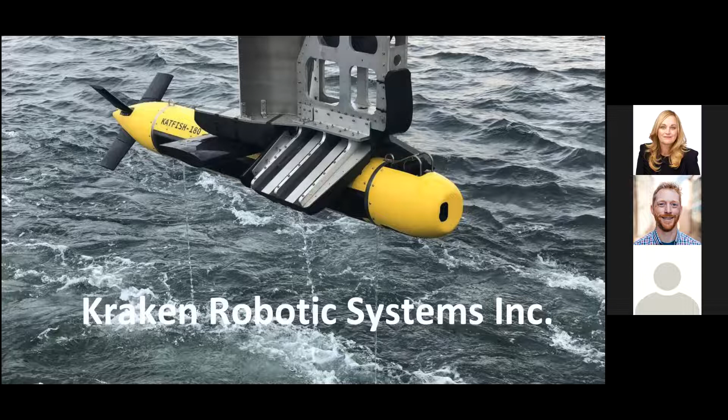So a brief introduction to Kraken. Kraken Robotic Systems Inc., headquartered in St. John's, Newfoundland, is a marine technology company. Last year we acquired Pangeo, also a Newfoundland company, establishing not only a product division but also a subsea service division. We now provide an integrated solution from sensors to fully turnkey robots.

We have grown to 225 employees, spread all over the globe. We have offices in Canada, USA, Germany, Scotland, Denmark, and Brazil, and we deliver services and products to over 20 countries.

So this is a little bit of our organogram from an office perspective. We are located in Rio de Janeiro and Salvador, Boston, Bremen, Rostock, Copenhagen, and of course St. John's, Halifax, and Toronto.

One of our main and first products ever created was a synthetic aperture sonar, quite a revolution in how you do seabed survey, since it provided about 30 times the area coverage of previous technology with better resolution and quality. This product we exported to many different clients and integrated into different market AUVs for autonomous seabed survey, and we recently also launched the same capability for man-portable AUVs for quick deployments.

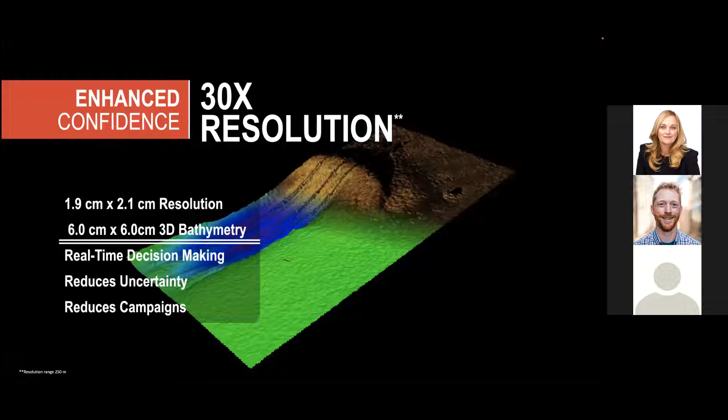With a synthetic aperture sonar, you can see the seabed with acoustics at 2 by 2 centimeter resolution, with included 3-dimensional bathymetry. So you have a full 3D, high precision image of the seabed, and you can acquire that level of data with that clarity at 4 square kilometers per hour in a survey - 10 times what the usual area coverage rate would be with previous technologies.

We developed the sensor in Newfoundland and integrated it into a turnkey solution for seabed survey systems for mine hunting and other applications, both in offshore wind and oil and gas.

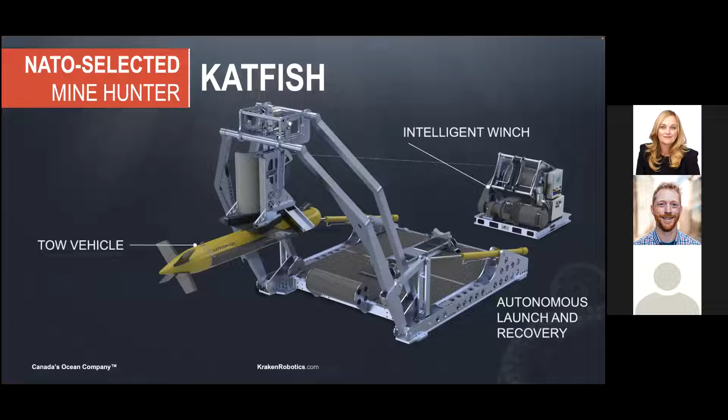We integrated the sensor, the synthetic aperture sonar, into a tow vehicle, which is very high speed. We developed an autonomous launch and recovery system and an intelligent winch. So this high-speed tow vehicle can operate at up to 10 knots with a 440-meter swath and over 4 square kilometers of area coverage.

With the exclusive Kraken deployment intelligent winch, which is heave compensated with active terrain following, auto tension, auto render, and an actuated A-frame, we can install this high-speed tow vehicle into ASVs, enabling full unmanned operation, with about 2 times the standard operation envelope, so you have way less weather downtime.

We also produce SeaPower, our line of subsea batteries, which instead of being oil compensated in a pressure housing are silicone encapsulated, doubling the current AUV endurance while still having less weight and volume. This is a special technology for deep waters, and we have integrated it into quite a few vehicles.

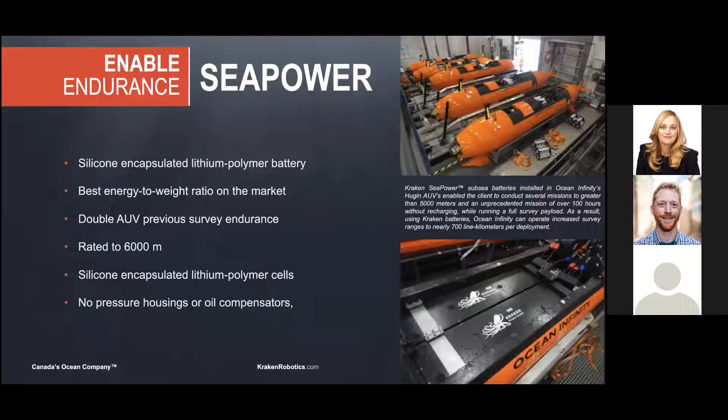With the acquisition of Pangeo into the Kraken family, we also now have our service business with the acoustic corer, which is a subsea bed acoustic coring tool with up to 40 meters of depth penetration. It's used for foundation location on offshore wind, jackup infrastructure decommissioning, and any geotechnical ambiguity in both oil and gas and offshore wind.

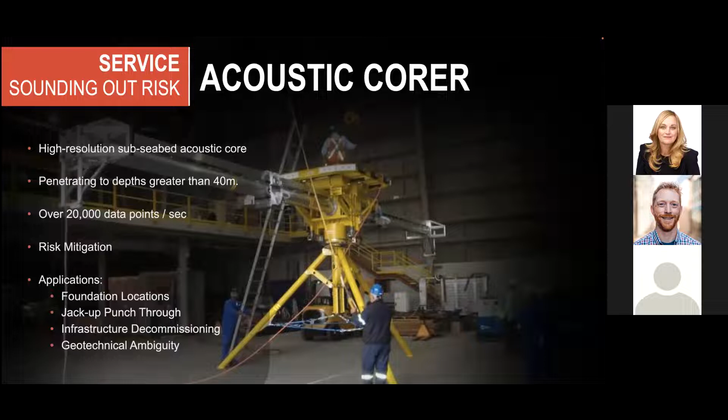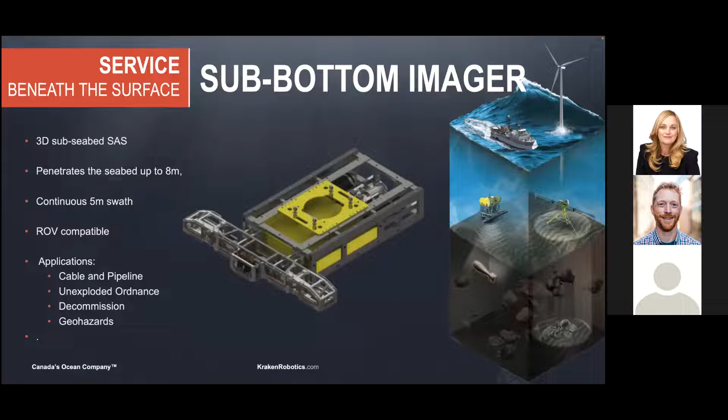We also have a 3D subsea bed synthetic aperture sonar array, which is mounted onto ROVs or as a tow vehicle, providing a continuous 5 meter swath for subsea bed analysis of up to 8 meters. This is usually applied to cable and pipeline burial analysis, unexploded ordnance finding, decommissioning, or general geohazards.

So this is a little bit of Kraken from a company perspective. Now we're going to go into the specifics of this webinar, which is the 3D laser technology developed at Kraken.

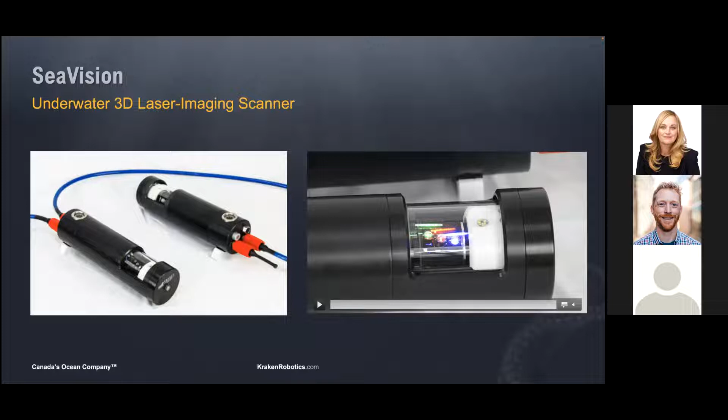So from our perspective, SeaVision is a 3D laser imaging scanner. It's a very compact twin pod system with a laser mounted internally on a turret. Within each of these pods, there's an embedded GPU, LED light, low light cameras, the lasers, and an IMU.

From a software perspective, we are combining laser technology with edge AI, computer vision, and photogrammetry. We combine all those capabilities to enable subsea field digitalization and metrology.

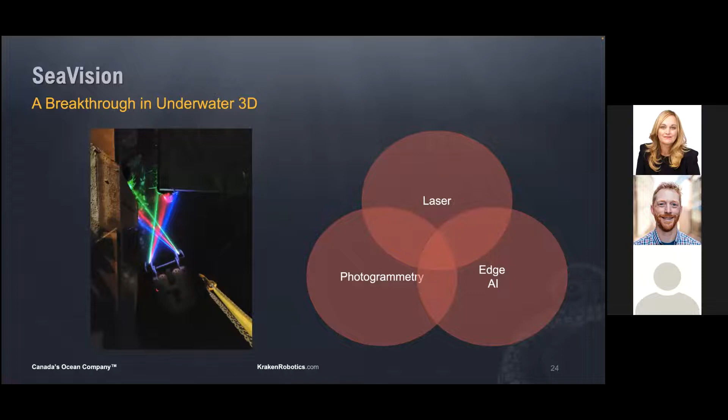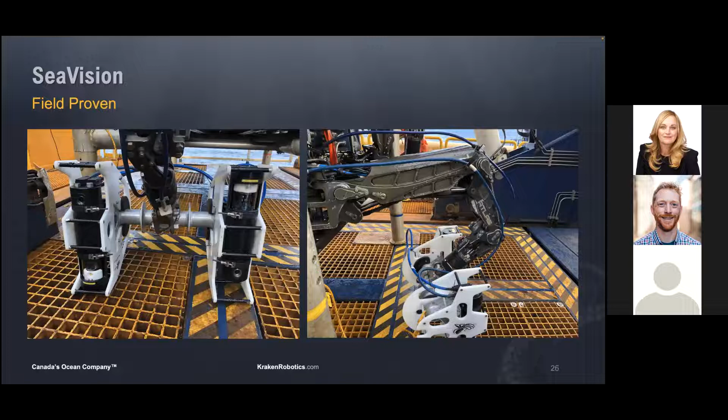SeaVision usually goes into any standard ROV used to maintain subsea fields. It has been deployed in Newfoundland, as well as other oil fields, offshore wind, and research applications around the globe.

The principle of SeaVision is that you have a three-dimensional reconstruction of the object ahead, in front of what you're observing. So you create a metrology-accurate 3D model of your structure.

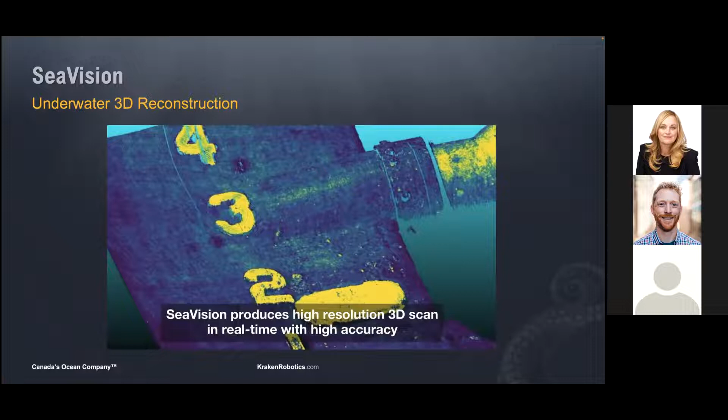SeaVision is also a laser imaging solution, meaning it's not only about the 3D, but also has the capability of generating high dynamic range photography co-registered to the point cloud. So you have a high definition, high dynamic range image, and at the same time a three-dimensional model of the structure, which allows you to measure.

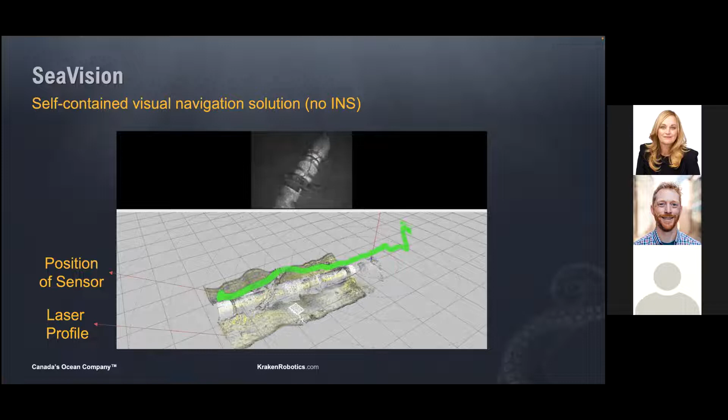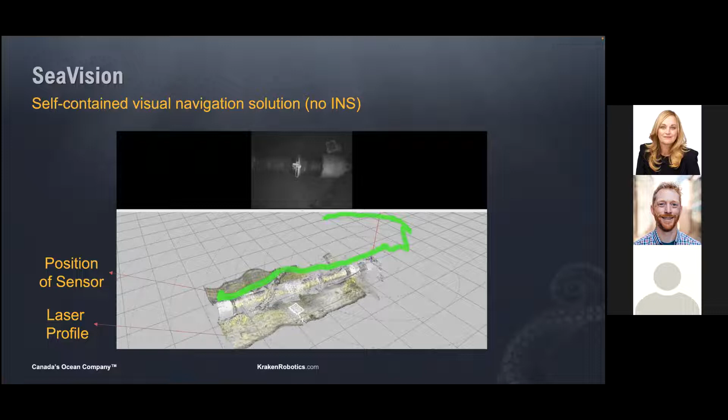SeaVision also operates not only with laser technology, but also with photogrammetry, enabling a self-contained visual navigation solution, allowing it to be directly attached to an ROV without needing an inertial navigation solution for the vehicle or inertial navigation calibration. It doesn't need a USBL, DVL, INS with a depth sensor, or sound velocity probe. You can just install the sensor, take it to the field, and reconstruct in 3D.

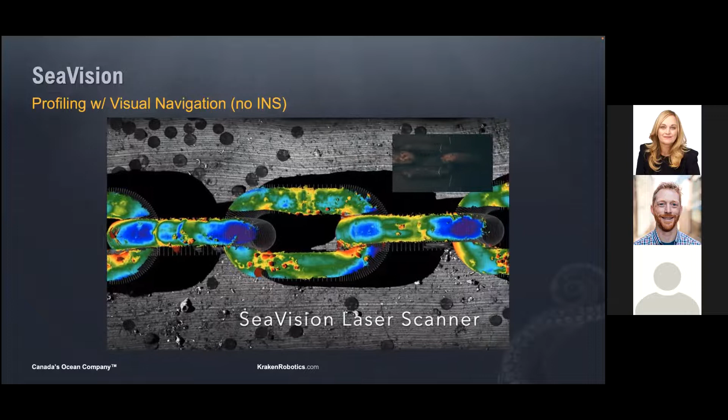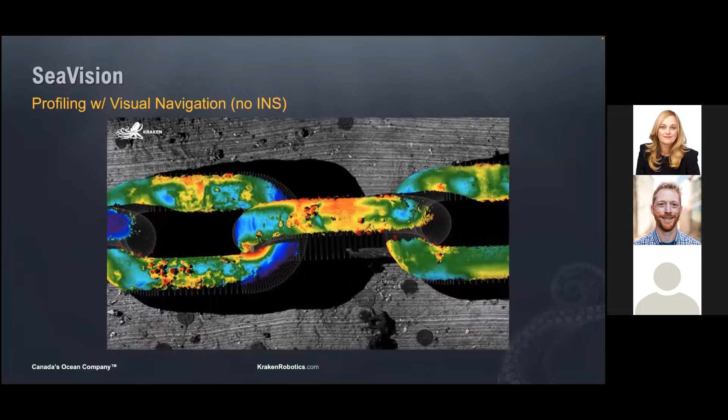This is an example of SeaVision being used in profiling mode, generating a detailed three-dimensional model highlighting the corrosion on this mooring chain. It's colored with a given corrosion heat map, and since it's a three-dimensional model, it can be used for all the class measurements and metrology assessments.

Another method of operation for SeaVision is laser scanning. Since the lasers are mounted on a turret, SeaVision can be used to scan what is within its field of view, and this can be done with the vehicle and the structure in motion. It uses its own visual navigation for correction of this motion, so this is a 3D scan with self-referenced visual navigation for motion correction.

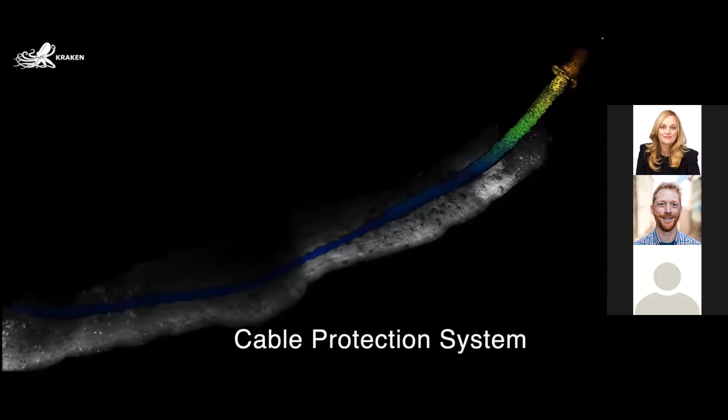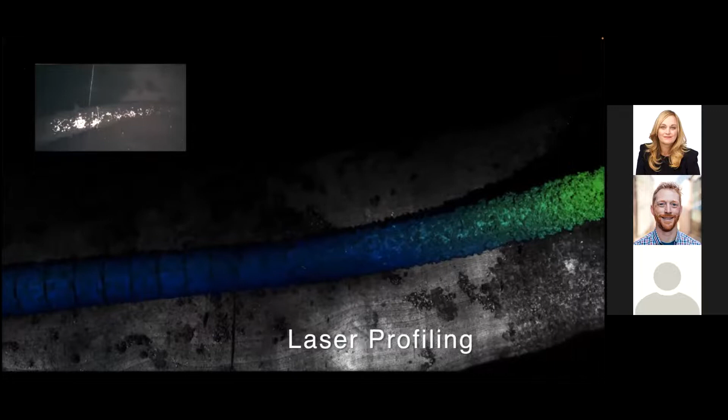A little bit of SeaVision results. This is an example from offshore wind: a cable protection system. SeaVision was on the manipulator of the ROV, pointed downwards. We did a profiling of the cable to quickly get it in its full length.

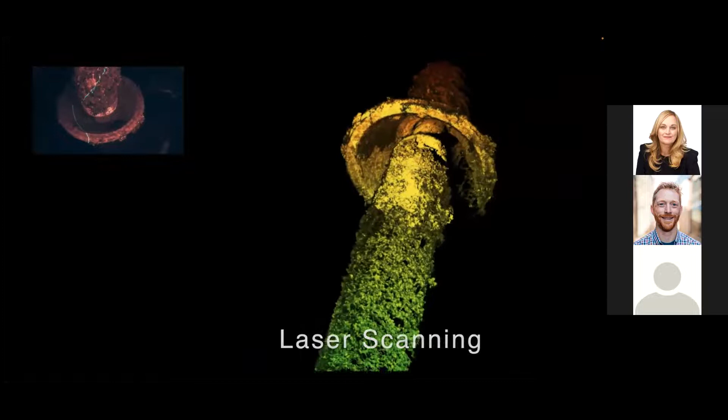But as with any 3D perspective, you have to address the fact there are shadows, as in any cylindrical surface, you cannot see what is behind what you're observing. You actually have to rotate around the structure and combine multiple methods of acquisition to visualize everything of interest on your three-dimensional model. In this example, we are combining the profiling from the top-down view perspective with the scanning, and since the SeaVision is on the manipulator, you can do all of that simply by pointing it in the direction of interest.

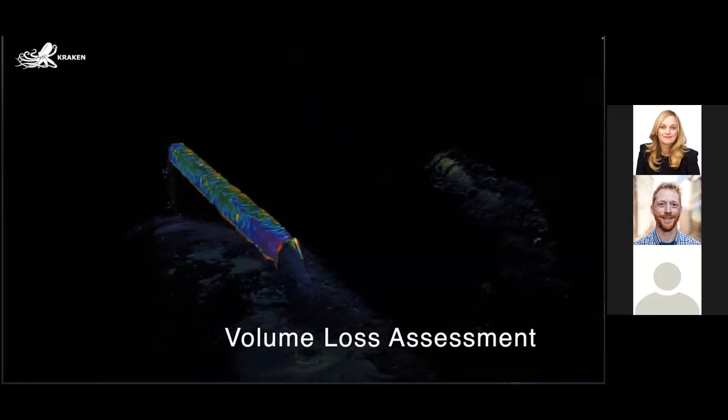This is another example, on an offshore wind farm where we were contracted to measure 72 anodes. It was an interesting deployment since the client informed us of the anode type we should expect, but we actually detected 3 different anode types installed on the asset. The client was not aware that different anodes had been installed, with different volumes and different corrosion rates. So there is always a little bit of a misunderstanding between what is assumed and what's actually down there.

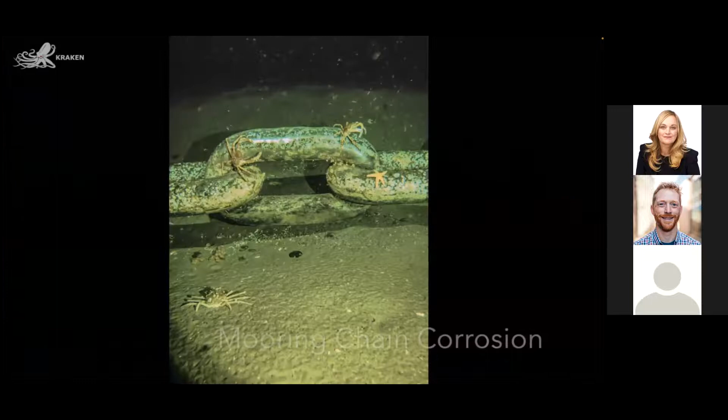Another example is a mooring chain, for corrosion and metrology assessment. In this example, we're also going to analyze and show how precise SeaVision is compared to a surface 3D laser. We performed experiments where we took a mooring chain and did a full three-dimensional model analysis of the chain underwater, and of the same link on the surface in a metrology lab with the most up-to-date laser available on surface.

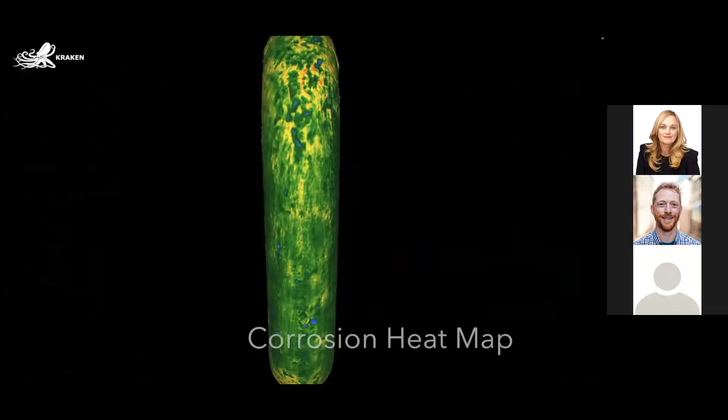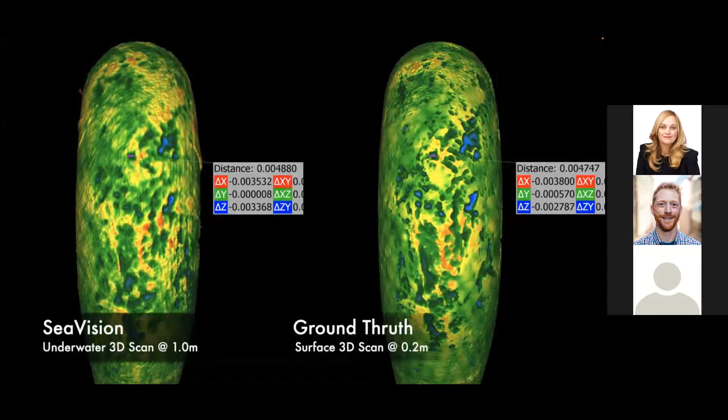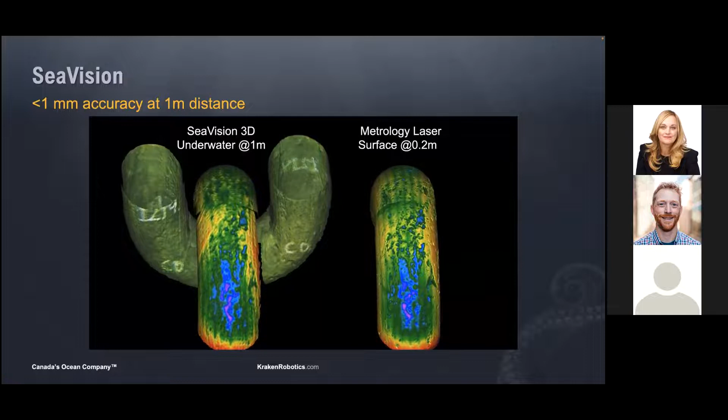Of course, underwater at a meter distance it is not as good as the surface, which is expected, since you're dealing with a lot of optical complexity that you do not have on the surface, such as marine growth, fluctuations of snow in the water column, and it is also a function of distance. But as you can see, all the critical three-dimensional structure shapes and formations can be modeled with below 1 millimeter accuracy underwater, using the underwater SeaVision 3D laser scanner.

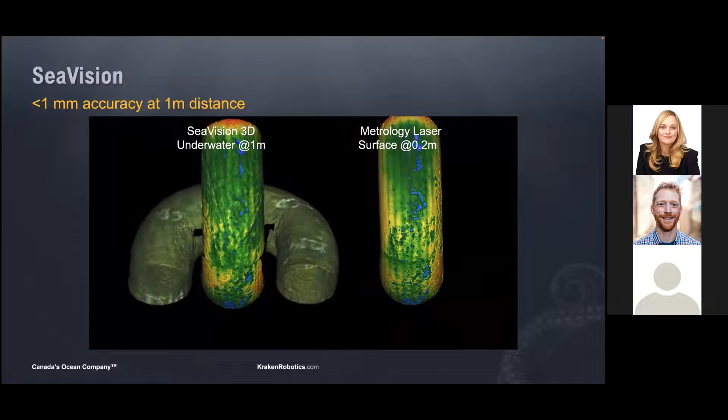Now, SeaVision has a few different remote operational tool sets and characteristics, which are quite important to enable remote deployment of the system. The first perspective is: how do you control the system if you're not there? SeaVision has a web interface, meaning I can connect to a SeaVision from any location in the world and fully control that unit.

With real-time video streaming and real-time 3D reconstruction, SeaVision also has the capability of running on the edge AI solution.

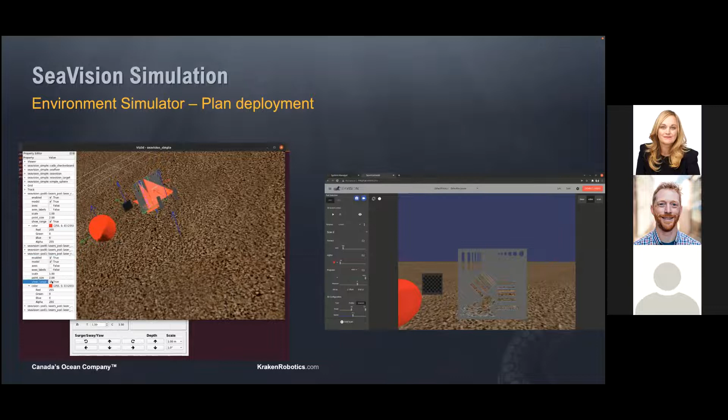One problem that recurrently occurred is sending the system to be integrated without being present, leading to a very complex integration because troubleshooting something always went wrong. The system in itself is a bit of a black box—until it's working, it's actually not going to tell you it's not working.

So we developed a hardware simulator, which allows us to simulate all the characteristics of a SeaVision. You can actually test automatically if the load in the connection is enough, if the synchronization is correct, if you have communication.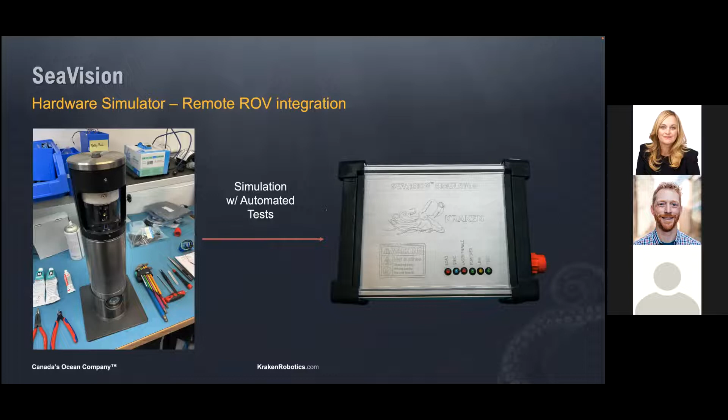So we can ship that, and it has all automated testing with lights to show, oh, I am successfully integrated. Now we're going to show how we use all of that technology to do a remote operation on an oil and gas field.

In this particular example, we were contracted to do reverse engineering to enable a repair on an umbilical terminal assembly. A cable line broke, they had no CAD models, and they had no way to plan or repair the unit.

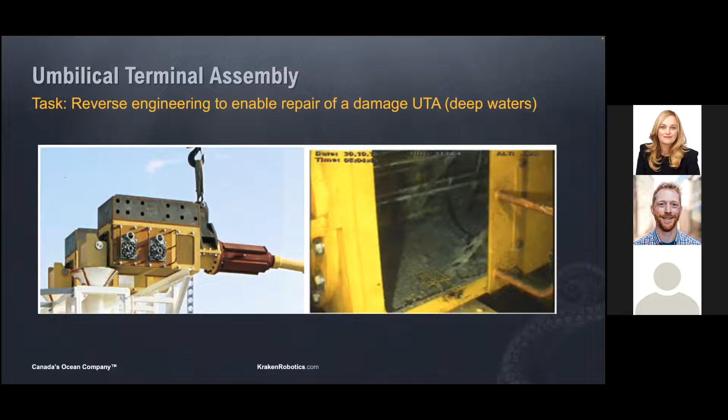So you have something which is of age. This was located in deep waters. There was no option of actually sending personnel in country, so we really had to deal with solving this problem remotely.

The first thing we did was send out the hardware simulator to test the connection to the vehicle where the system would be deployed. We actually detected an error in the cabling between the vehicle and the system—the laser enable was not correctly set. If we had sent the system out as is, the laser would never have turned on. We also detected a network configuration error, so we wouldn't even have been able to communicate with the system, and people would be wondering whether the system was even working or on.

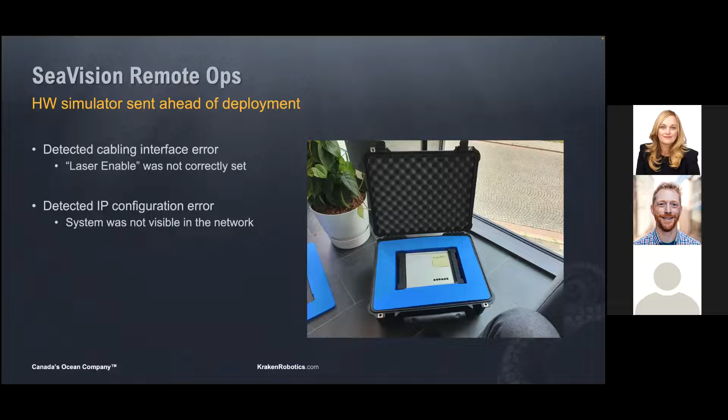The second thing we were able to do is use our environment simulation to simulate the principal shapes of the umbilical terminal assembly, and to estimate which poses and positions, how much clearance and access we had with the system in that environment, and what could be viewed and covered to reconstruct in 3D.

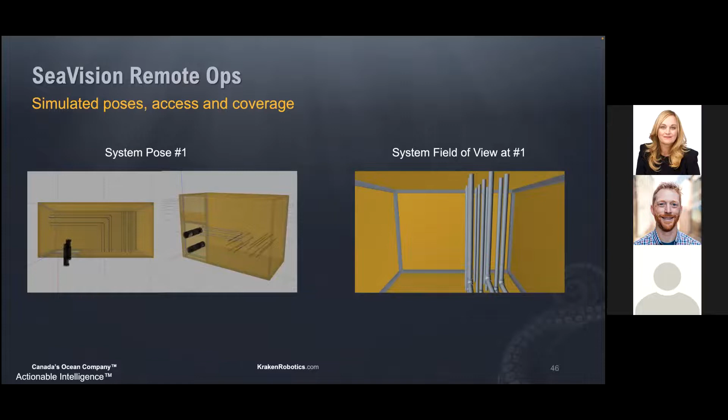Once all of that was planned and set, we packed and shipped the system out fully calibrated, so that once it arrived on site, it could be just plug and play.

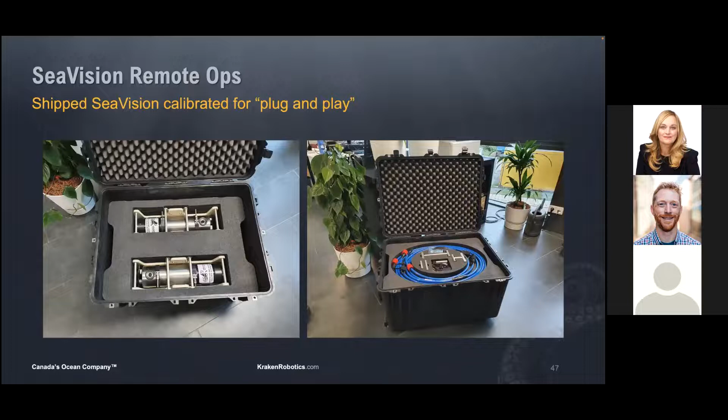We have a full level of automation for multiple scans with multiple parameterization configurations that you can trigger and watch the data occur. Once the data has been acquired, it can be uploaded to the server for any post-processing and analysis. This is an example of the multiple pieces of data from the UTA which was collected—all the multiple scans or profiles in different view perspectives.

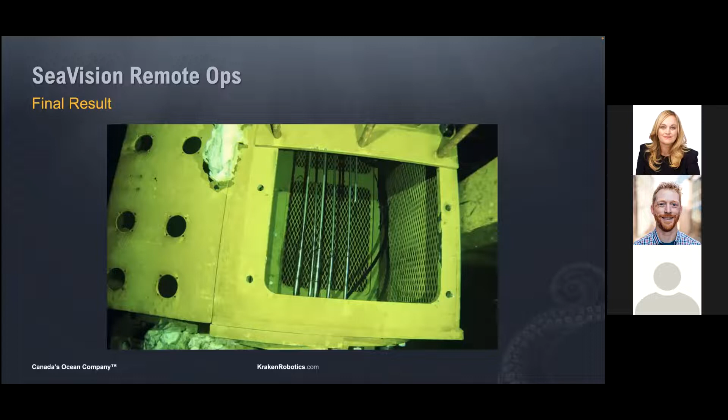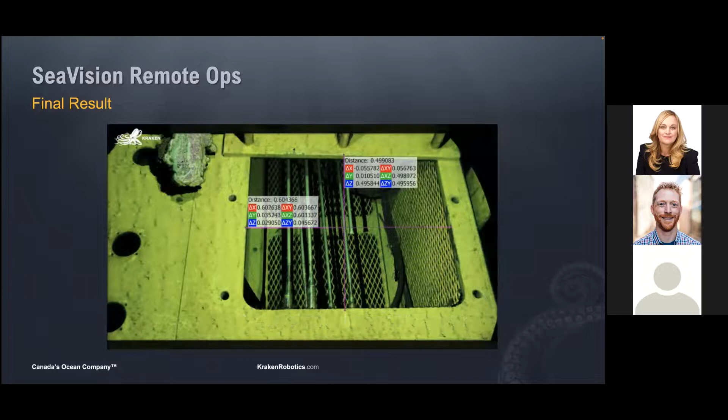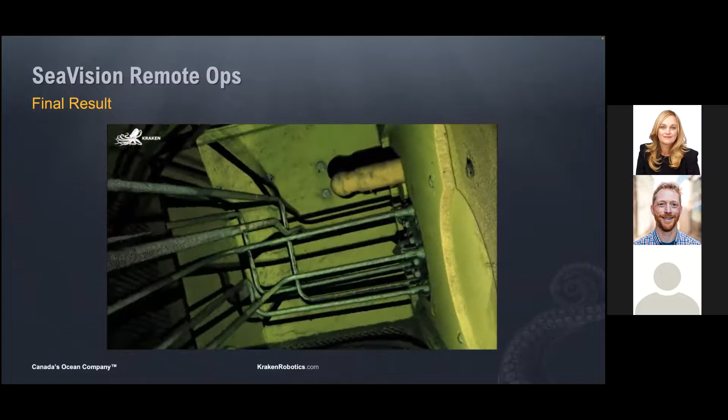All of that is built together into the digital model and reverse engineered into the CAD. So this is the final result of this remote deployment. This is a photograph, and this is the three-dimensional model, which gives you all the metrology measurements, like the measurement of the entry, measurement of the tubes, measurement of all the relative distances. This is actually not a video of the internals, but a three-dimensional point cloud of the internal. So it's a reconstructed 3D model.

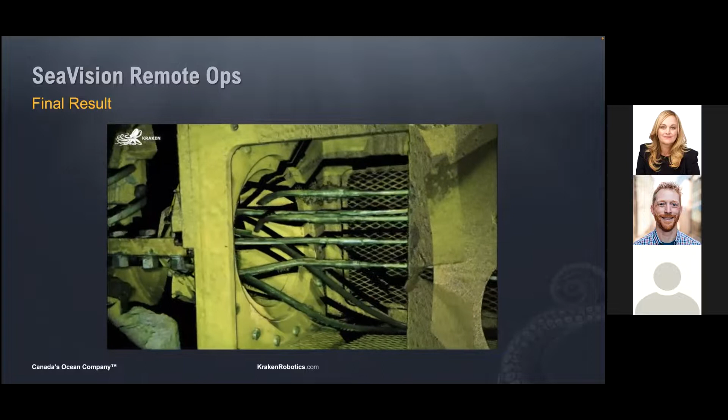There you can see a little bit of the manipulator. So this is again a photo of the system and a reconstructed 3D model.

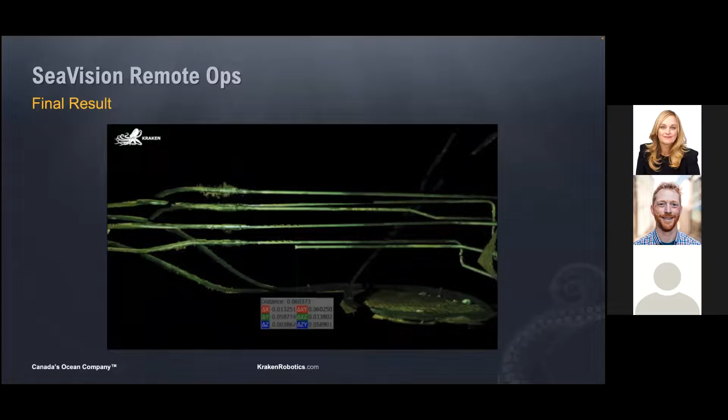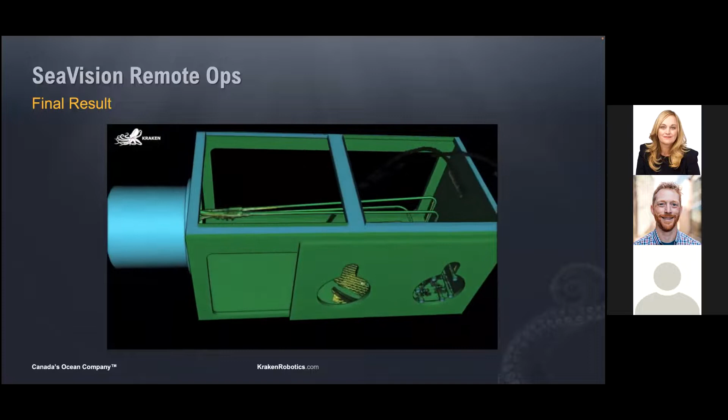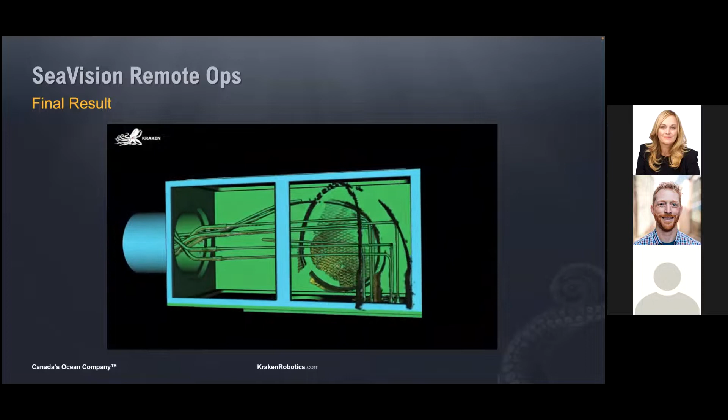Since it's a 3D model, you can always edit it, like cutting out all the external of the structure to focus only on the pipeline. You can measure the distance between the broken line and the most adjacent line, so you can see any access to repair, or even reconstruct from this 3D model, reverse engineer the CAD so you can import it and do all your planning for your repair of the structure. And now the structure is a digital structure, which means it can always be compared to any future analysis of that structure for change detection and corrosion assessment.

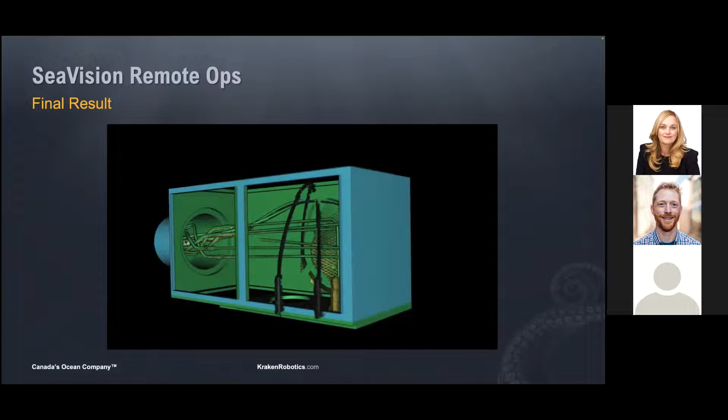So thank you very much for your interest and attention today. I hope this was at least instructive and not overly monotone. I'm open to questions. Thank you.

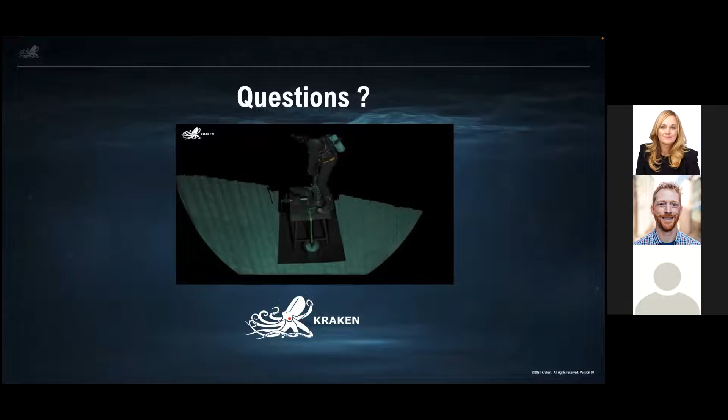I like the idea that what you're using there is from that digital side of things, looking at a digital twin beforehand to develop your plan of attack on how you're going to do all your measurements, as well as using that digital twin in the future for future analysis of that system.

So I'm going to put it out there for any questions or comments, and I'll see which ones are coming through. I got one here: what are the minimum network requirements to transmit data? What's your worst case?

So we like to operate in gigabit Ethernet because it means the system is operating at full capability and it's a lot more comfortable. As you reduce the rate, the only thing the system really needs to transmit topside is a video feed, and that video feed will deprecate in quality as the connection goes down. So you can regulate what the quality of the video feed is and what the frame rate is.

On this particular deployment, we were in the most terrible connection possible, towards a third world country, on a vessel without a proper satellite link. So it can be painful, sometimes very slow video feeds and a little slow to react, but you can operate it in almost no bandwidth. It just gets very exhausting.

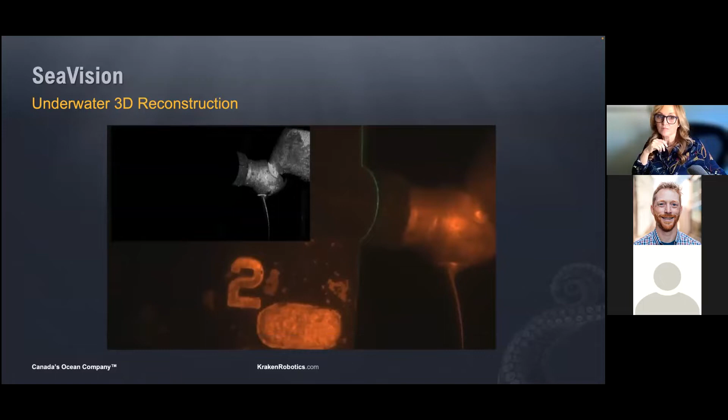But right now, if there's no further questions or comments, just to complement the question, this video is real time. It's not accelerated, so you can see the laser line passing over the structure.

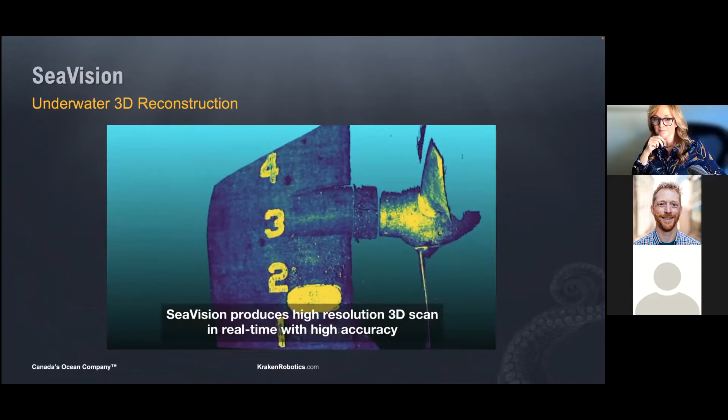Yes, excellent, and that is a 3D scan. That's just one scan providing that propeller, giving your entire field of view. You can also profile, which is continuous motion, meaning the system is always recording as you move along. The velocity of your motion can be as quick as you wish.

We have acquired laser, I think with the catfish, at 6 to 8 knots. It's just that the resolution between the laser lines, we're acquiring 120 laser lines per second, so the faster you go, the more distance you have between lines. It's very basic math, which I won't dare do in my head online on a webinar, but yes, I can understand it's quite quick in general.

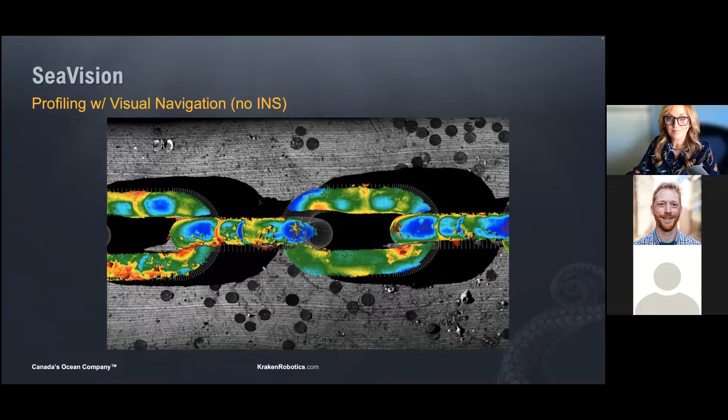I got one final question before we go into our concluding remarks, coming from the audience: do you see any other applications for your technology?

Other applications - everything that you need and want to have digitalized or measured. This is intended to be as common in any underwater inspection as an ROV video camera feed. I mean, it is a video camera feed, the only advantage is that you actually get a metrology and a model out of it. So it's our hope that it becomes a standard in the market for any subsea inspection, because if you're using a camera, there's no reason you cannot get a 3D model of it. You're really going from a plain 2D inspection to a 3D inspection, which you can even compare in time to create a 4-dimensional analysis of your asset over time.

Wow, thank you Patrick, I like your point of view there. It's the way everything is becoming very sophisticated now, it's just a matter of fact this is going to be standard practice. You're absolutely right, this is the way things are going in the digital world. So with that, I want to say thank you, and I'm going to pass it over to Karen now for any concluding remarks.